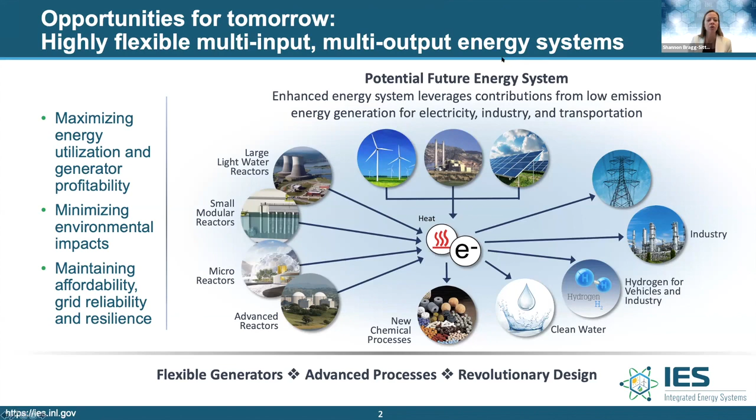While our nuclear plants can certainly provide this operational flexibility, and there is a rich history in countries such as France, Germany, and more recently in the US of doing just that, I contend that we need and can do much more with our clean, reliable, and dispatchable nuclear energy to also make significant advances in the harder to abate sectors such as heavy industry and aviation.

Now, when we look to the most prominent efforts to decarbonize, these often begin with a focus on the electricity sector, and they also look to opportunities to electrify transportation and industrial processes. However, not all processes can, nor should they be electrified. The heat demand across all energy sectors far exceeds electricity use.

As shown here, in the US, 83% of the ultimate energy use is in the form of heat. That jumps to 88% for the industrial sector. Hence, making significant progress toward emissions reductions must entail increased utilization of non-emitting thermal sources.

Nuclear plants generate energy without environmental emissions, and the primary output from a nuclear plant is heat. That heat is traditionally converted to electricity to support the grid, but this conversion, while necessary, results in exergy loss. Even a relatively high 40% conversion efficiency from heat to electricity, which can then be sent to electrified processes, still leaves a large amount of energy simply to be rejected.

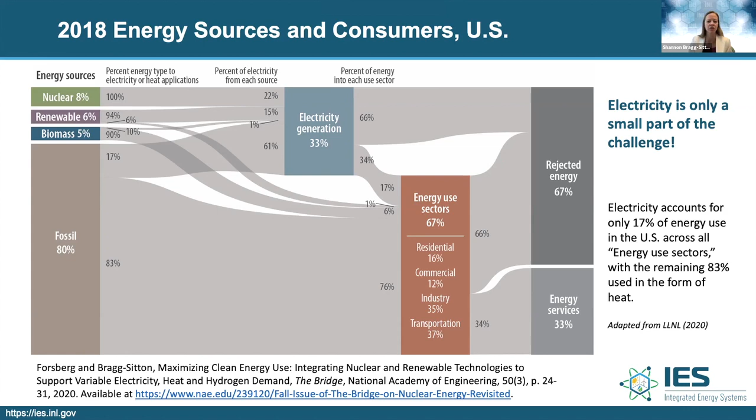If we instead allow renewables to support grid electricity demand when those resources are available, and then use the heat produced by nuclear plants when we don't need the electricity, we not only enhance the flexibility and economic viability of nuclear plants, but we also make great strides to decarbonizing industry and transportation.

In this manner, nuclear energy working flexibly alongside renewables can directly support industrial demand, or it can be used to produce process intermediates such as hydrogen that can supply an array of consumer products. These integrated or hybrid configurations can provide greater operational flexibility as well as system efficiency through flexibly dispatching the generated heat and electricity. This is often referred to as systems having product flexibility.

In 2016, the US DOE National Laboratories partnered to study how we might reduce emissions across the industrial sector by using these non-emitting thermal energy sources, including nuclear, concentrated solar, as well as geothermal. We evaluated typical processes in each of these target industries.

Overall, we found that nuclear technologies, specifically small modular reactors, should be very well matched to the scale of demand of oil refineries, pulp and paper manufacturing, methanol and fertilizer plants, and many others.

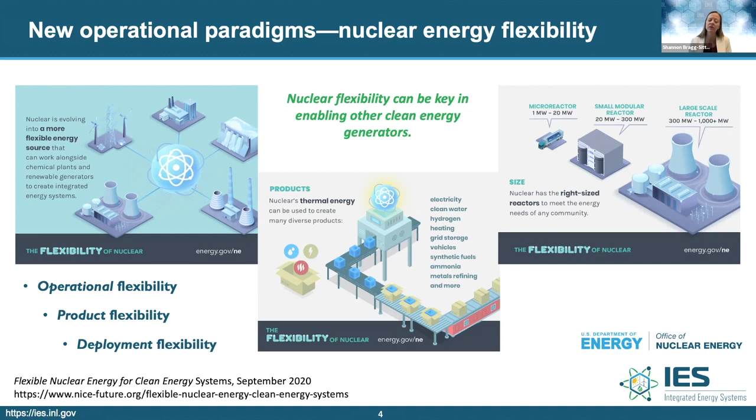In some cases, heat recuperation and temperature augmentation may be needed to support thermal energy management in these systems, and we may incorporate thermal energy storage as an intermediate component in order to better match clean energy delivery with the thermal load schedules for coupled processes, particularly when we look to batch plant operations. But overall, we can effectively replace fossil fuel combustion.

So I'd like to take a moment to focus on hydrogen, which is part of many energy discussions and many of the analyses that we are conducting today. Hydrogen is a highly versatile energy carrier that can support many downstream applications: electricity production via fuel cells, including for the grid and in fuel cell vehicles, ammonia and fertilizer production, synfuel production, metal refining, and providing feedstock for a range of chemical processes, as you see in this chart here.

Currently, hydrogen is mostly produced via steam methane reforming, which also produces carbon dioxide as a byproduct. However, when we generate hydrogen using electrolysis processes, using clean heat and electricity to break down water molecules, that hydrogen can be produced with zero carbon intensity. Markets for this green hydrogen are growing dramatically around the world.

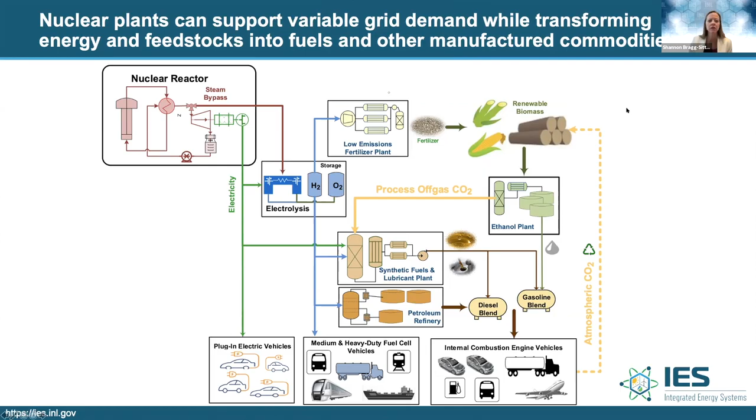But hydrogen is just a starting point. Nuclear energy, when it is deployed with consideration given to operational flexibility and this product flexibility, can and will be a major contributor to our clean energy future. But we don't have to wait for advanced reactors to accomplish this paradigm shift.

In the US, 3 of our current fleet nuclear plants are preparing right now to demonstrate this product flexibility, with hardware demonstrations of nuclear hydrogen production beginning this calendar year. These flexibility approaches are also being introduced to our advanced reactor-based plant designs that are expected to be demonstrated and deployed in this decade.

As we consider our future energy systems, we need to think more broadly than our current experiences about how each of these resources might support our growing energy demands across all use sectors. And we need to think globally, sharing our knowledge and experiences to accelerate these technologies to market through platforms such as the NICE Future initiative within the Clean Energy Ministerial. Thank you so much for your time today.

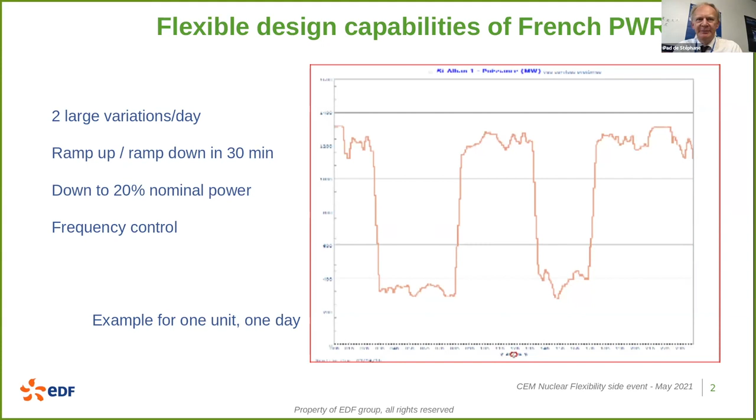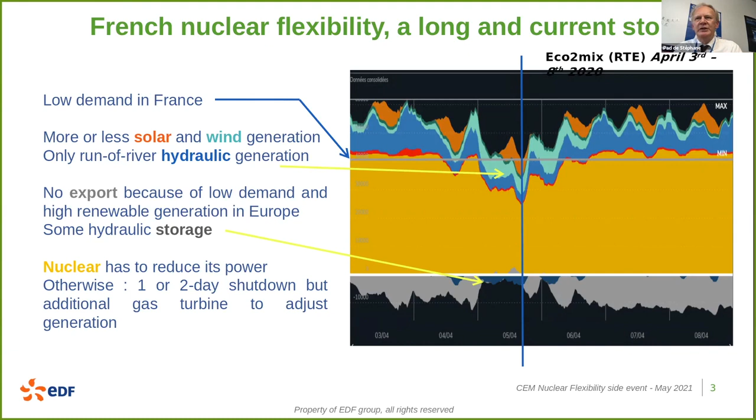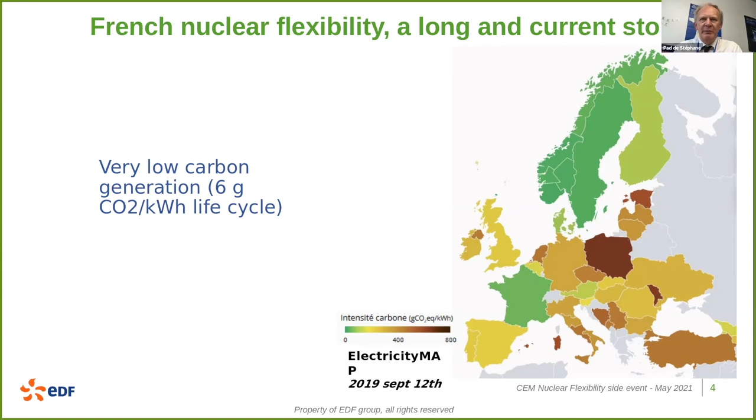And the last slide is to compare the amount of CO2 per kilowatt hour between countries. France is in green because we emit less CO2 than other countries. Data are from the Electricity Map website. It's a very good app, and you can see also other countries worldwide.

To take care of the planet, to achieve carbon neutrality, or at least reduce CO2 emissions, the world needs different tools. No tool taken alone is the solution. Nuclear energy is a part of the solutions. It can provide huge quantities of energy, electricity, of course, but also heat. It is a very low carbon source.

It is profitable. French electricity prices for customers are under the European average and much lower than in Germany, for instance. And it is flexible. You can reduce the power output when the consumption is low or when renewables generate a lot, as I've shown you on the slides.

In this way, nuclear energy is competing against gas and coal, which are the other massive, dispatchable, and flexible sources of electricity. But nuclear does it without CO2. Nuclear energy is a good way for an electricity mix with a large amount of renewable.

Other tools are complementary to nuclear flexibility: storage with batteries or pumping stations, grid interconnections at a continental level, smart grid, power-to-gas-to-power systems, cogeneration of heat, and of course, hydrogen. For instance, you can produce hydrogen when renewables are generating a lot. Instead of reducing the power output of a nuclear plant, you can use electricity surplus at a very low cost to produce hydrogen by electrolysis without CO2.

Thank you. In Poland, still around 70% of the electricity is generated from coal, so it is completely unsustainable, and our government is trying now to transform the energy sector very rapidly to fulfill its obligations coming from European Union policy and international obligations. Poland approved last year a new energy policy, and this energy policy is composed of 3 pillars.

One pillar is a just transition, so it means nobody will be left behind during this transition. The second pillar is zero emission energy system, so we are committed to a net zero system by around the year 2050. And then finally, improve the air quality in Poland.

Pillar 1, just transition, is a very important part of it, because we want to have a reduction in energy poverty in Poland. We want to take care of the customers, and then introduce new industry in the Polish energy system, and the new industries are the renewable sector and nuclear energy sector.

So we want to have 300,000 people employed additionally in the clean energy sectors. The zero emission system will be composed of 3 parts.

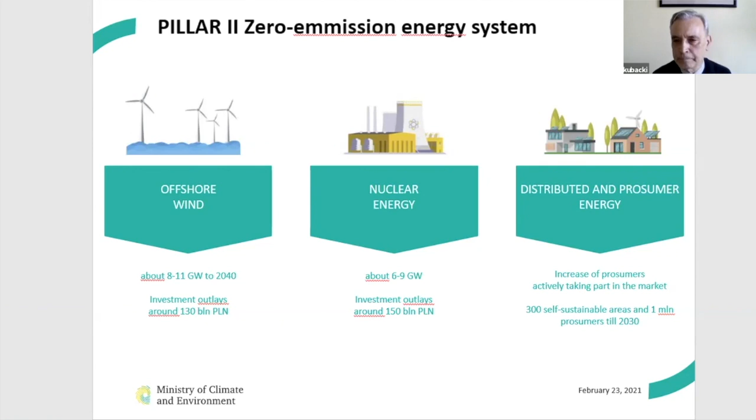We want to build very rapidly offshore wind on the Baltic Sea. We want to build around 6 to 9 gigawatts of nuclear. And the final part of the zero system will be distributed and prosumer sector. We want to have a very large sector, and people will be able to produce clean electricity for their needs.

This new Polish nuclear power program has the following assumptions. First, we want to have the first large power station in 2033, and then every 2 years from that date there will be a new unit built in Poland. So together there will be 6 units, up to 9 gigawatts of electricity potential.

We want to adjust the legal conditions, propose a new business and financial model, operation model for nuclear power plants. We want to have an active role of the state. We want to improve and empower the Polish regulators. And finally, there is the role of small modular technology in Poland with a perspective to 2040.

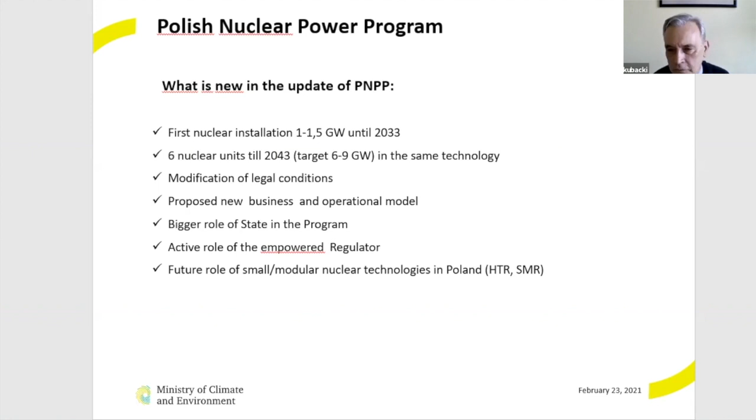The Polish nuclear power program has the rationale which is almost the same in any country deploying nuclear power. It's energy security, protection of environment, and economic benefits. The Polish nuclear power program is very important from the perspective of climate. We want to follow an ambitious climate policy.

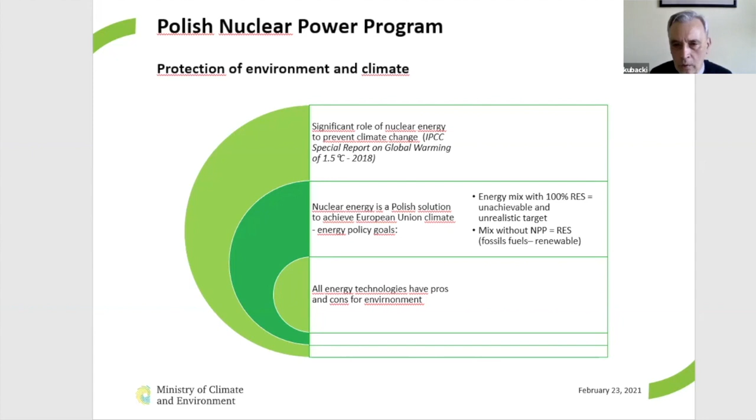Generally, nuclear will bring for Poland a lot of benefits, like zero emissions, the lowest use of land, the possibility of cogeneration in Poland producing heat for districts and industrial purposes, the lowest concrete per unit of energy generation, the possibility of future recycling of nuclear spent fuels, and saving of valuable materials like rare earth elements.

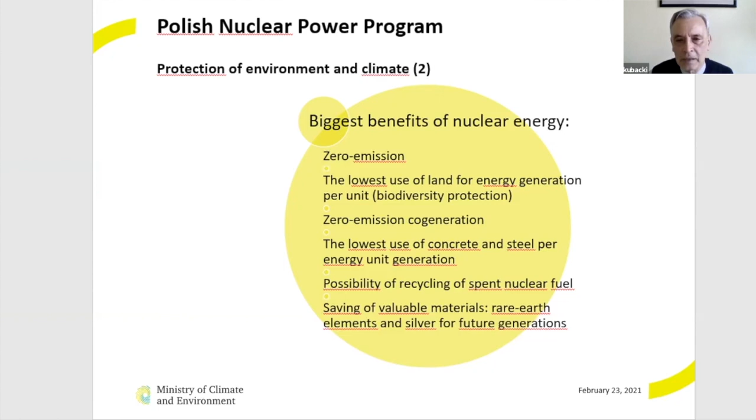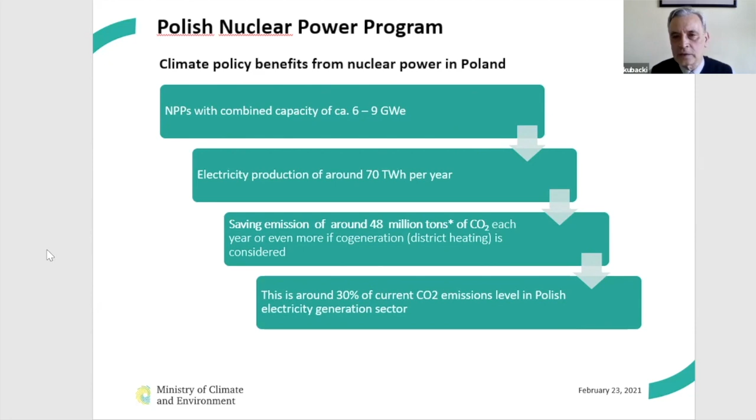In general terms, climate policy will benefit from Polish nuclear power, from our perspective, because electricity production from the nuclear power plants in this current version will be around 70 terawatt hours per year. We want to save through that way around 50 million tons of CO2. It looks like we will be able to cut emissions by 30%.

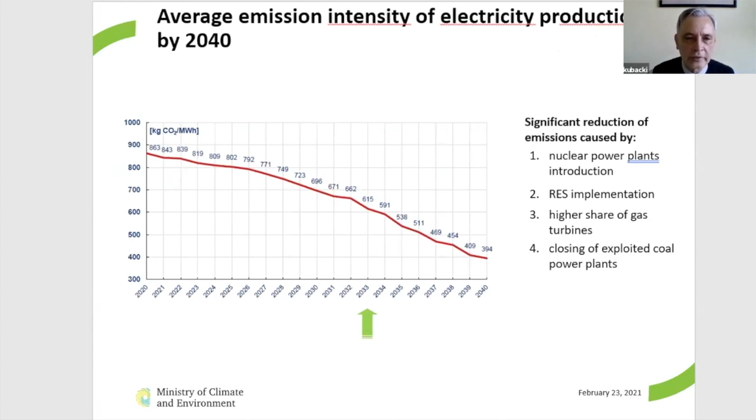You can see this situation on this graph: the steep decrease of emissions and the fulfillment of the climate obligations and objectives by Poland through the introduction of nuclear power. This is a big opportunity for countries like Poland.

Although we are now thinking as a government about large scale reactors, we are fully aware of the potential of SMRs, especially HTGRs. We are starting very large scientific projects on HTGR, which we are targeting mostly for industrial cogeneration. Having zero emission sources will save us large amounts of capital. And then there is a synergy between the large and small program.

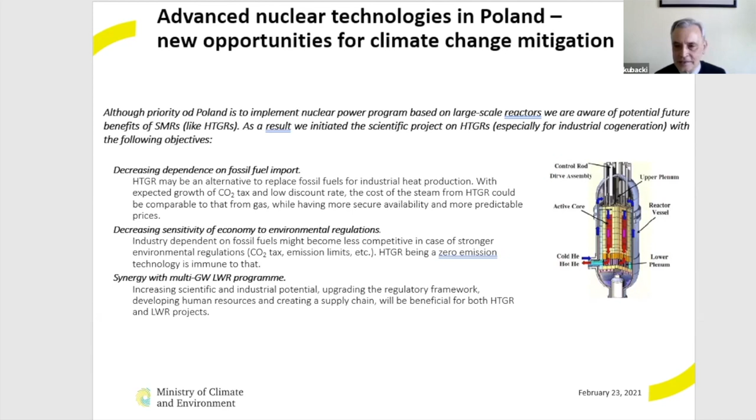Concluding my remarks, I'd like to give the floor to Staffan, because we have cooperated with him for some time. He prepared 2 excellent studies. The retrofitting potential of coal power stations is a viable option in Poland. I'd like to thank you, and now I ask Staffan to present his very interesting studies and analysis of the Polish retrofitting options. Thank you.

Thank you, Mr. Kubacki. I will give a quick introduction to the idea we call coal power retrofit decarbonization, or coal repowering, which is basically a useful pathway of ideas for countries such as Poland that have built up a large coal power fleet and now, due to climate and environmental issues, need to retire that fleet. The premise of the idea is whether we could reuse some of that infrastructure going forward, whether it has a role to play in the future or not.

Coal power is well known as being the largest source of carbon dioxide emissions globally, and also the largest source of electricity currently. Locally, it's even worse than that, on a local basis. So as we heard, 70% of Polish electricity, the same fraction in India, a little bit less in China, but these are very, very large places. So a lot of plants, up to 85, even 90, 95% of electricity in some countries.

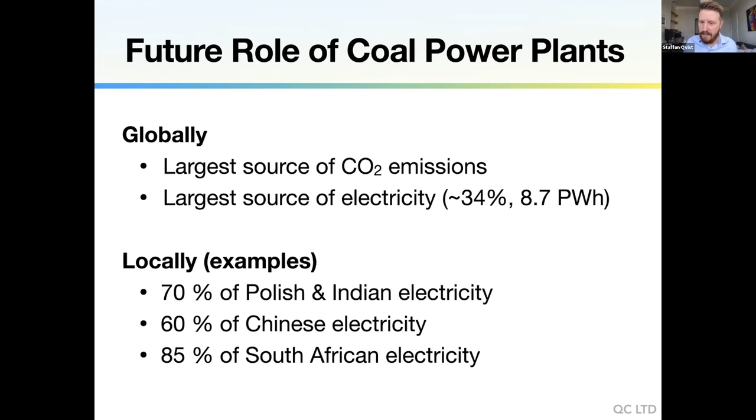All of these plants will need to either somehow stop emitting CO2 or retire in the very near future. There have been large investments into these plants, and many people work at these plants. That is a problem both from an economic standpoint and a just transition standpoint. That's kind of what we were trying to address in this research program.

The coal power plant fleet today is around roughly 2,000 gigawatts worth of capacity, most of which is young in terms of infrastructure. Half of that capacity is less than 14 years old. The capacity weighted age of the coal power plant fleet is about 17 or 18 years old or so. And they can run for many, many decades, technically.

Every time we add a new gigawatt of coal plant capacity, we add or commit to around 200 million tons of additional CO2 emissions. So the idea is, can we avoid stranding all these investments we've made, and avoid firing the local workforce?

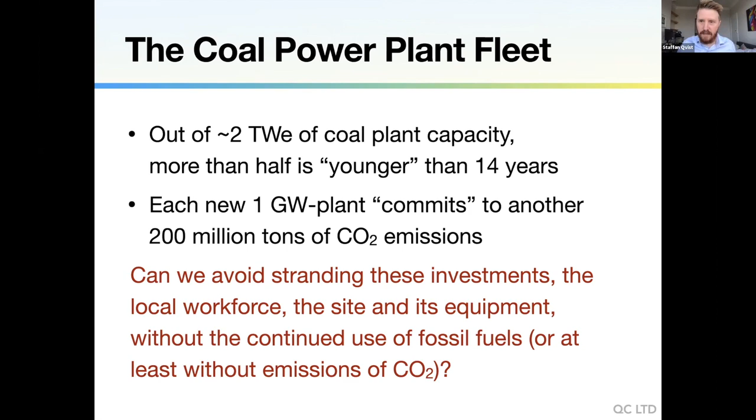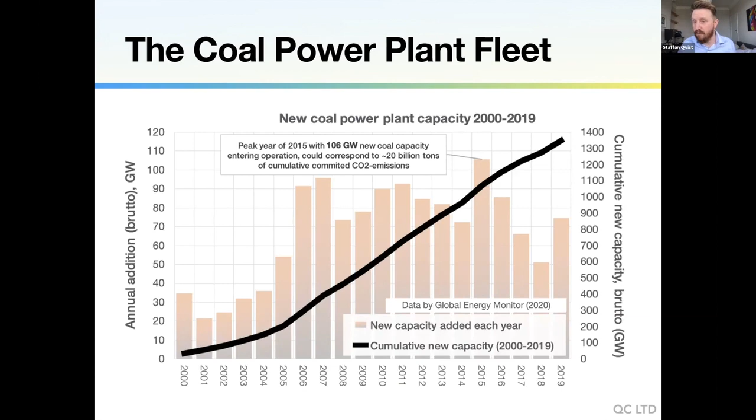Can we use that site and equipment without continuing to burn fossil fuels, or at least without emitting CO2 in the future? This graph shows the coal power plant capacity we've been adding even as we've been talking about climate mitigation. We've added enormous amounts of new coal capacity globally, over 100 gigawatts per year in certain years, and this fresh new infrastructure can run for many decades, maybe 50 or 60 years if well maintained. So what can we do with these plants?

Could we stop burning coal in these plants and replace that heat source with something else? Or maybe replace coal with biomass, or put post-combustion carbon capture on these plants? We looked at all of them, and concluded that the most elegant and effective way would be to replace the heat source itself, the coal boilers, with a zero carbon heat source. The most obvious technical fit would be a high temperature nuclear reactor or a high temperature geothermal heat source.

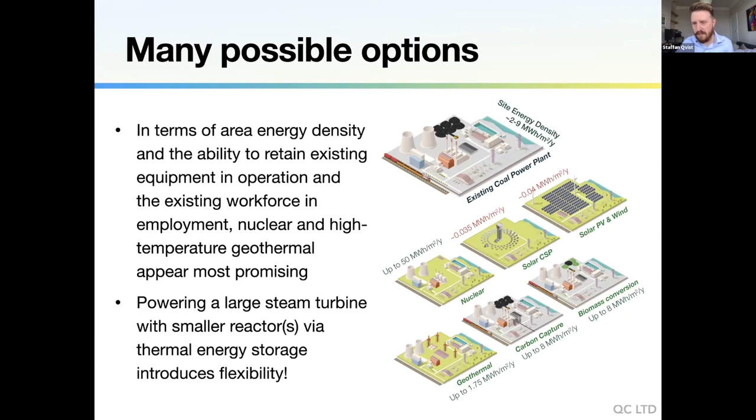That's what we looked at in detail with many excellent Polish partners and researchers at Polish universities, and currently with Polish utilities and industrial companies. On a global scale, the repowering or retrofit decarbonization idea will most likely go in one or both pathways of nuclear and high temperature geothermal repowering.

We reuse as much of those sites as we possibly can, retain those assets, retain the workforce, and avoid the committed emissions from those assets. No one wants to shut off a brand new coal power plant they've just bought and paid for extremely prematurely. If you can retain that asset productively while eliminating CO2 emissions, it's a quite elegant idea in principle.

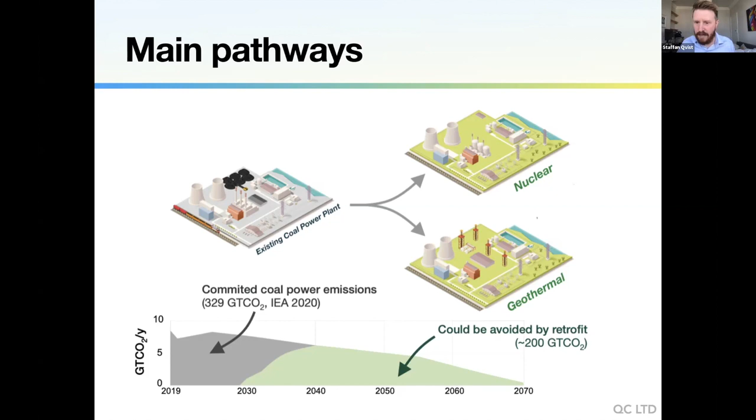We try to figure out whether it's practical by doing a case study specifically for Poland, with excellent Polish researchers involved. We made a study to categorize and characterize all of the Polish coal units in terms of their age, steam conditions, site sizes, and what kind of retrofit would be suitable.

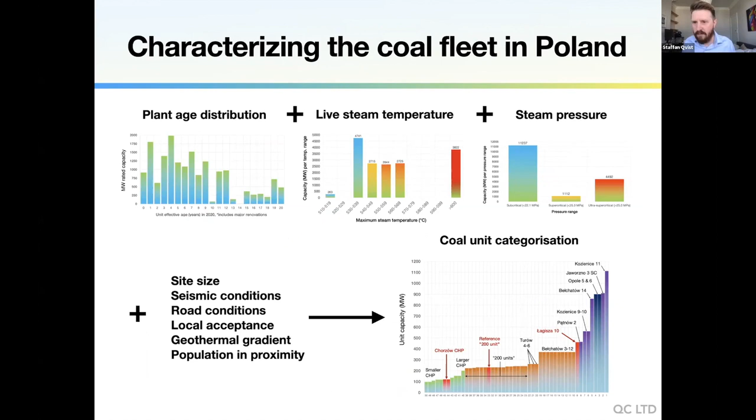We came to the general conclusion that about half of the Polish coal-powered fleet could be retrofit decarbonized, most of that using nuclear. That would provide the bedrock for a future clean energy system in Poland, with a cost-optimal mix of new renewables and a firm, reliable power source—the large fleet Mr. Kubacki was mentioning, a greenfield fleet backed up by a repowered fleet of SMRs.

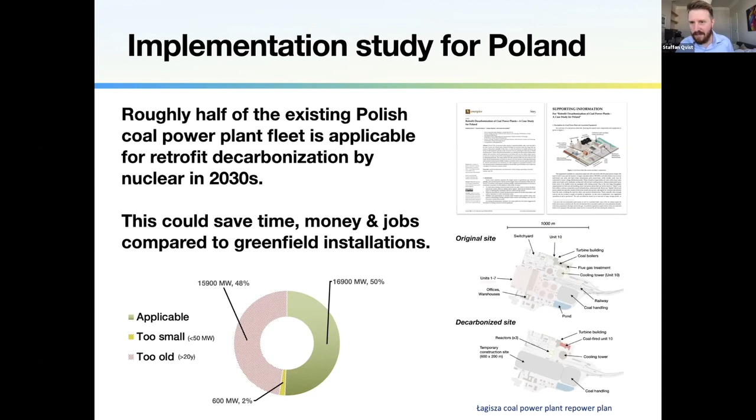We made a really detailed study about this, including the sites, which I can't go into here, but it's freely available for anyone to download—a couple of papers on that.

We are continuing this work with very detailed case studies in Poland, alongside Polish utilities and industrial companies, and with Mr. Kubacki's ministry involved. We want to start introducing thermal energy storage as the interface between nuclear reactors and existing coal plant steam cycles. We are doing the same in China with a large group of very active and excellent Chinese partners.

We are also trying to figure out whether we could repower coal plants that run at very high steam temperatures to instead run at lower steam temperatures and parameters, maybe just the lower pressure, lower temperature part of those steam turbines, so we could repower them with more conventional geothermal or existing light water reactor technology.

That's as quick as I can do an intro about this idea. I have a few pictures, which I promised to show.

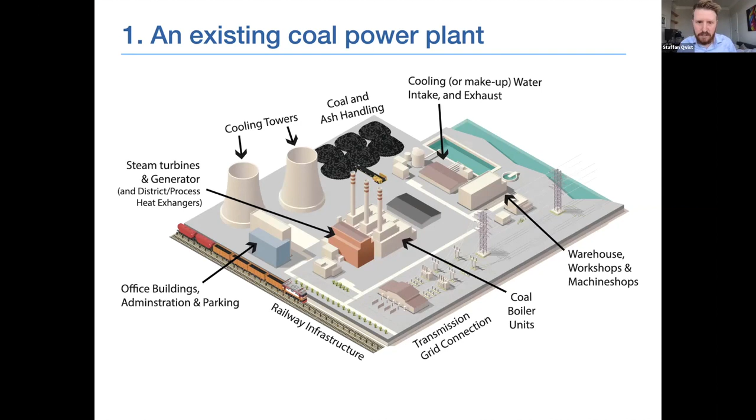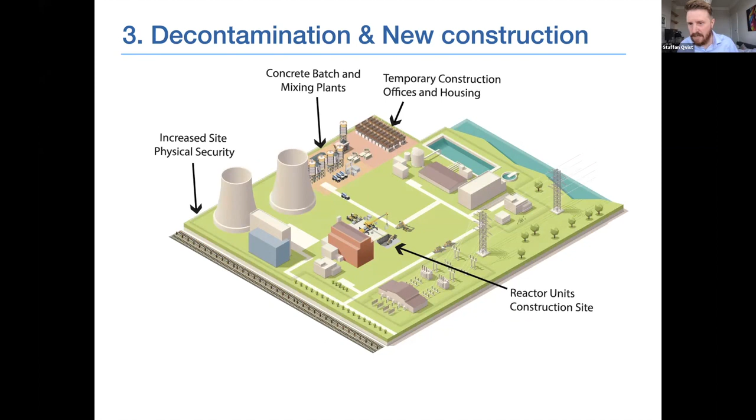In most cases, we will decommission the coal and ash handling facilities and the boiler units marked in this picture, establish on-site a construction site for a low carbon replacement—in this case, SMR high temperature small modular reactors—and then put them into operation.

So we've retained most of the equipment on site in terms of scale. In comparison to a greenfield project of the same type, we probably saved about one third of the cost, and probably saved some time as well.

That's what our analysis showed. Most of the bulk of the local workforce could be retained in this kind of transition. So we want to put this type of idea out there. We want to study it more in Poland in detail with Mr. Kubacki and his team, and hope that it spreads all across the world. Anyone who's interested, please reach out. Thank you, huge thanks, Zbigniew and Stefan.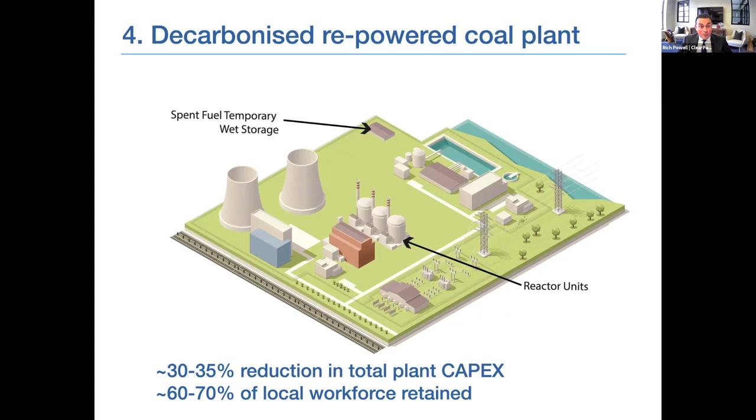In some sense, this question of how to repurpose the infrastructure, the energy communities, the workforces, and the value chains as some of the world's coal fleet retires in the coming decades is perhaps the most enormous and poorly addressed question in the global energy system. So it's terrific, Stefan, that you're starting to put serious analysis into that question. It does seem like Poland could establish a model for the world, ideally one that China and many other countries can follow. Very exciting to hear.

Now to take us even deeper into that topic, we're going to turn to Eric Ingersoll, who's a co-founder of TerraPraxis and is also very deeply looking at this opportunity of coal to nuclear transitions. Eric, over to you. Thank you, Rich, and special thanks to Stefan for an amazing presentation about repowering coal plants. I'm going to talk about that as well, but from a different angle.

As we know, coal emissions are a very significant part of power sector emissions, and just the locked-in coal plants, the ones built recently, could exceed the power sector carbon budget by a large margin. As Stefan pointed out, half the global coal fleet is less than 20 years old, and from a financial perspective, that means more than $1 trillion of invested capital in those plants has yet to be recovered.

This means it's very unrealistic to assume that these assets will just be abandoned early in their useful lives. Furthermore, there are significant jobs, electricity generation benefits, tax revenue, and the reliability role that these plants play on the grid. These are all benefits that these plants produce today that make it very difficult to shut them down prematurely.

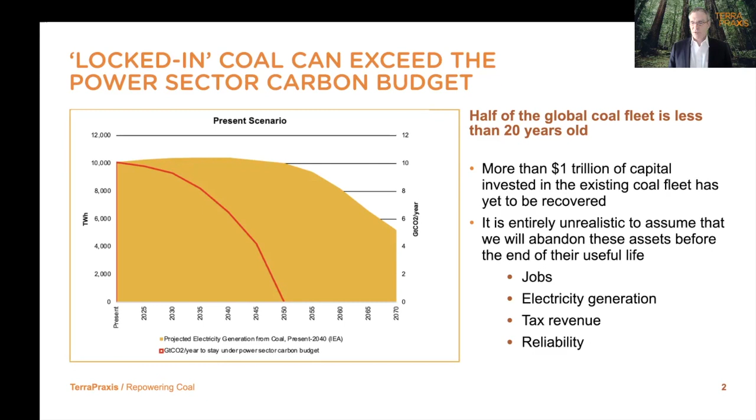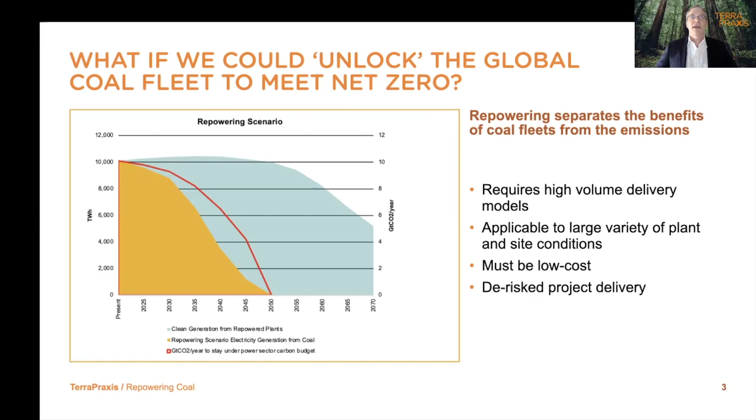But to do this on the timescale we're talking about would require very high volume delivery models for the projects, and these would have to be applicable to a very large variety of plant and site conditions. Obviously, they would have to be very low cost and attractive investments for the owners or operators of these plants. So how can we achieve this kind of rapid and cost-competitive coal plant repowering?

We know from analyzing the projected costs of advanced nuclear plants that if you can reduce the scope of a project substantially by reusing many parts of the existing power plant, such as the turbine, the grid connection, the switchyard, the cooling system, etc., this can result in a substantial reduction in cost. And if those remaining systems and buildings that need to be delivered can be delivered in a standardized and optimized way, we believe it will be possible to have the new plant operate at a lower cost of energy than when it was a coal plant.

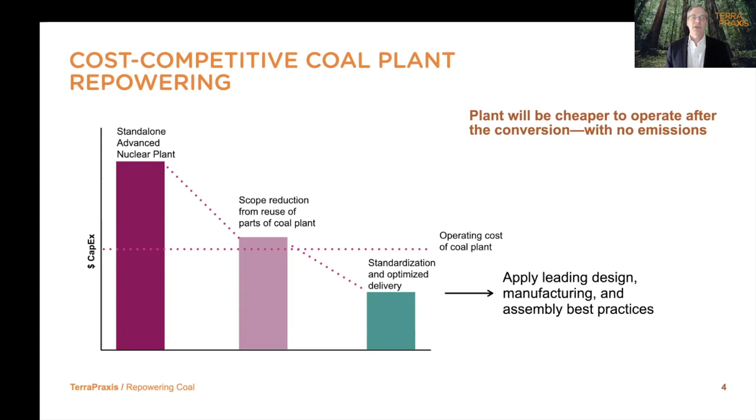So the same generation, none of the emissions. But to do this, we need to apply leading design, manufacturing, and assembly best practices. What does that mean for this kind of system? We're designing for rapid, large-scale coal fleet repowering, so we want to focus on repowering whole fleets at a time, not single plants at a time. We already talked about de-scoping the project by reusing the majority of the existing plant.

We're looking at highly automated and very fast design processes, having algorithms design the building that the advanced reactor would go in, built out of components already designed for high-volume manufacturing and rapid assembly on site. These buildings would be designed to be flexible, accommodating a range of different advanced reactors coming to market in the 2020s. So one design system would enable multiple different reactors at a whole range of coal plants.

The threshold here is to make this a low-cost, attractive investment for plant owners. In other words, not something that just saves their asset from being written off, but something that's an attractive investment for the new capital coming in to fund the project.

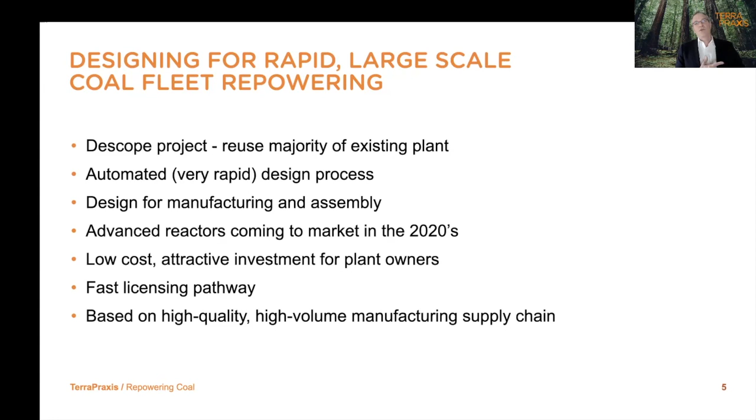We're also working on a fast licensing pathway. As we move to more standardized designs and reuse of standardized reactor systems, the number of things that are different between each project starts to become very small, and the system can be designed to make it easy for the regulators to review and approve. And all of this would be based on a high quality, high volume manufacturing supply chain for all the components that would be able to be blended to integrate local suppliers when those are available.

So we've recruited a team that's helping us transform this problem into an opportunity. We have a $1.4 million project underway with a global team of experts, including Bryden Wood, who are experts in algorithmic design, MIT for thermal engineering, Nuvia for nuclear systems, University of Buffalo for civil engineering and seismic strategies. And Southern Company is our first utility partner, but we expect to have multiple utility partners who are the intended users of this system. This breaks the deadlock keeping the coal fleet in place.

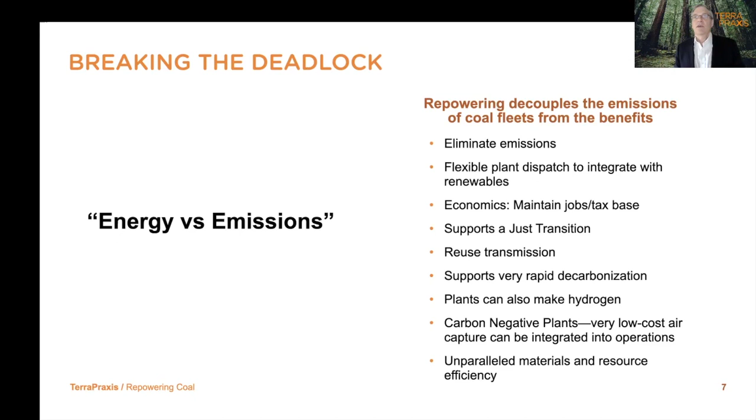And that's energy versus emissions. The energy is valuable, the energy is needed. Many of the countries that have recently built coal plants are beginning to start economic development on the backs of those assets. This decoupling of the energy from the emissions allows us to maintain and enhance a whole range of benefits listed here without contributing to climate change.

We have a 3-year plan. Our first year's goal is to create a screening tool that will be available as a hosted web-based application to allow coal plant owners to screen their plants and their fleets to do high-level feasibility analysis for repowering projects. That tool will be available by November, and we hope to have every coal plant owner in the world use that within the next year or so.

The next phase of the project is delivering a conceptual design tool. This is a tool that will actually cost out and do preliminary design on a whole range of the parts of your repowering project and allow you to get relatively accurate schedule and budgetary information. This is designed to enable the real project development process to get underway.

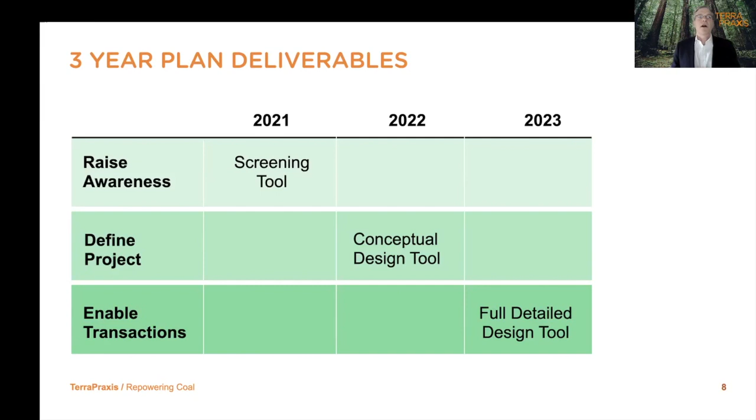And finally, at the end of 2023, we expect to be delivering a detailed design tool that can actually be used to finalize licensing, get building permits, contract with vendors, and manage the procurement and project execution of the repowering process. So now we have a video from our design partner, Bryden Wood, showing how their approach to algorithmic design can be used for the process of repowering fleets of coal plants.

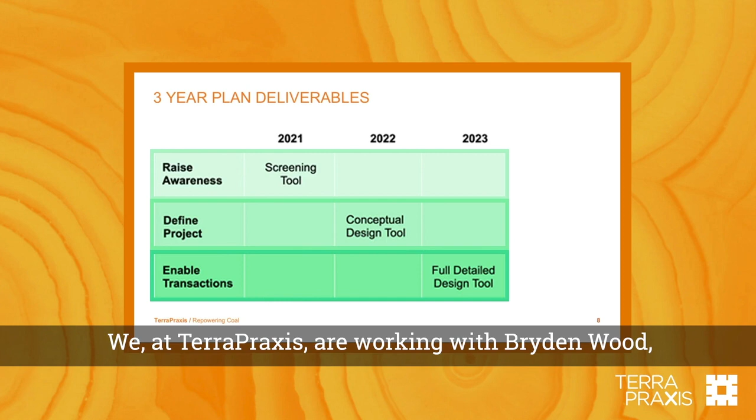Coal-fired power stations come in a wide variety of types, in a wide variety of sites and locations. We had to find a way to address this for the entire fleet if we are to achieve our timeline for repowering coal. We at TerraPraxis are working with Bryden Wood, who are experts in digital approaches to feasibility surveying, design and construction in multiple sectors.

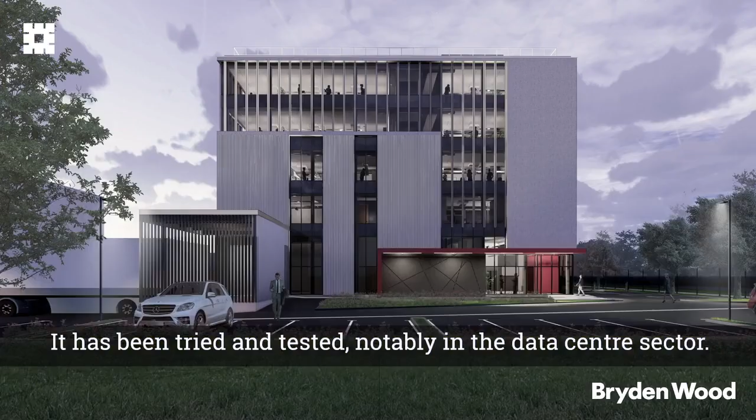Remember, we are focusing on the small part of each facility, the heat source that we will be replacing. The principle is the same for every facility. Our solution is automated feasibility surveying and standardized facility design. It has been tried and tested, notably in the data center sector.

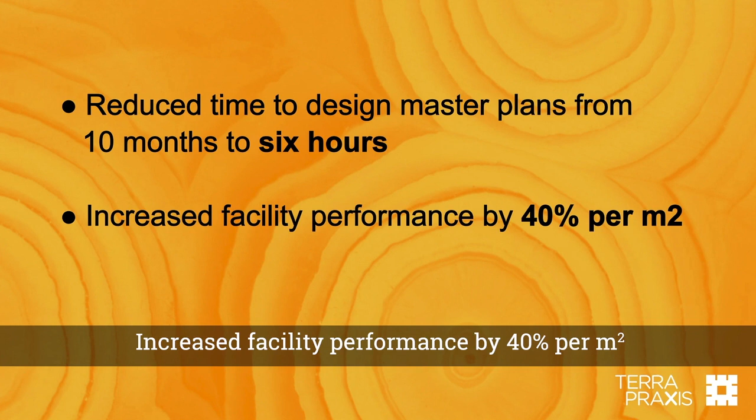In data centers, the process has reduced the time taken to produce a viable master plan from about 10 months to 6 hours, increased facility performance by 40% per meter squared, and reduced capital building cost by up to 40%.

Bryden Wood specialize in developing automated design tools for complex facilities on multiple sites. Our automated solution is built around clear rules for the optimal design for these facilities, which we then apply to specific sites. We start by defining our site.

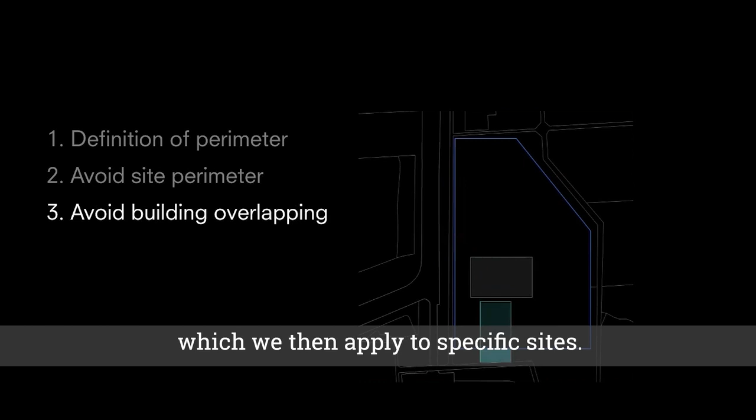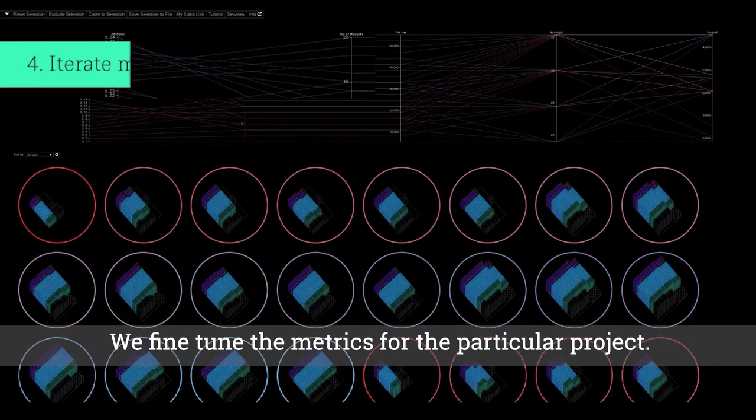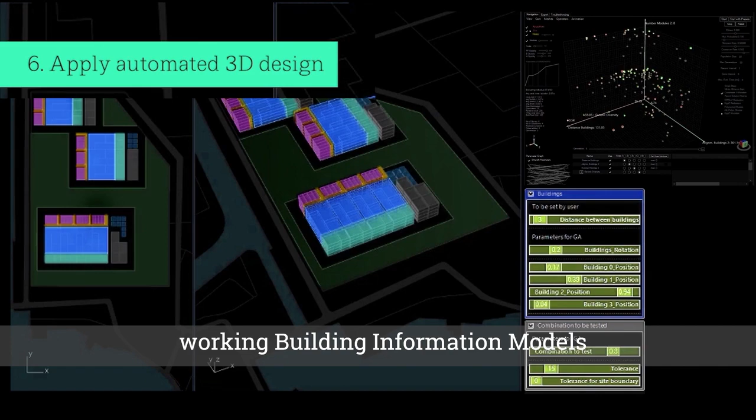We apply specific rules for the client, facility type, or location. We fine-tune the metrics for the particular project. We iterate and test multiple permutations until we find the optimal solution for the site. Then we move the design process forward and generate working building information models as a basis for procurement and construction.

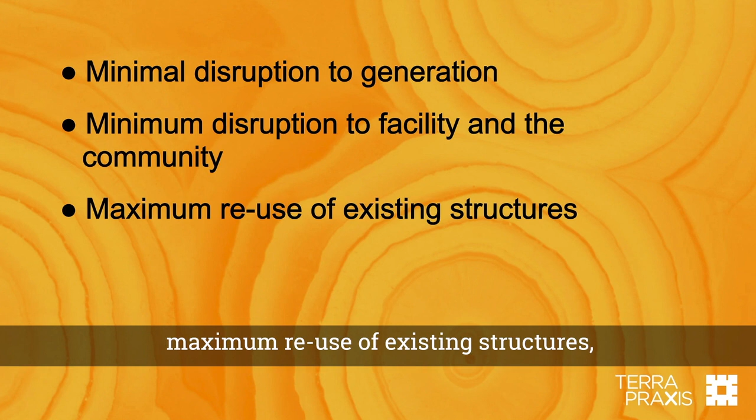Remember that we are not building power stations. We are replacing one part of the facility with a clean heat source. This means minimal disruption to generation, minimum disruption to the facility and the community, maximum reuse of existing structures. The facility, with its infrastructure including transmission, remains viable and profitable, retaining and sustaining high-quality jobs, dramatically lowering costs and business risk. A faster path to net zero, enabling the clean energy transition.